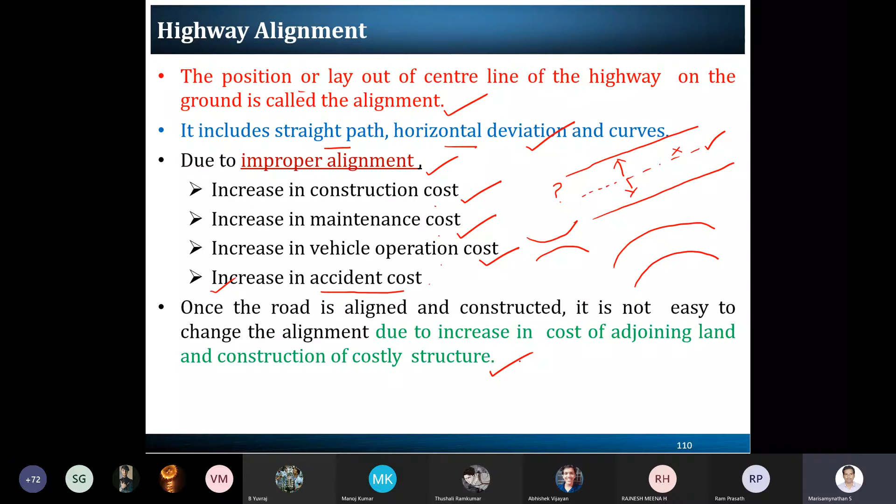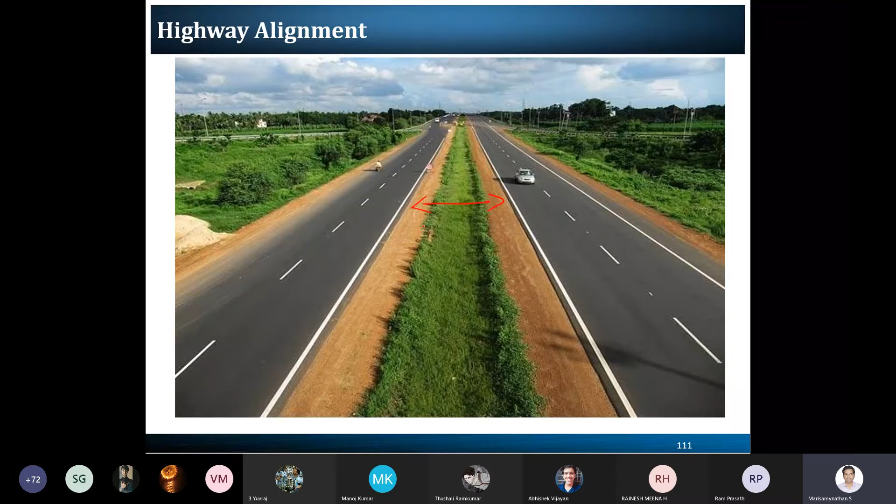This is one example of an Indian highway, with respect to the center line, how the straight road is perfectly or properly aligned with respect to the median. So this is an example of highway alignment for a straight stretch. In the horizontal curve, how it is there, the vertical curve - this is also one example of a vertical curve, and this is another example of a horizontal curve.

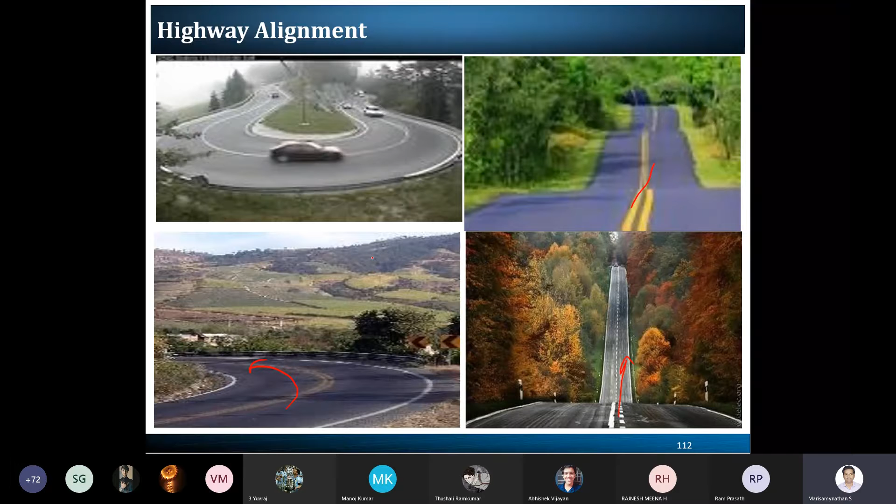So all this alignment we are going to study in the next unit with respect to a lot of equations and various problems we are going to solve in unit 2. So with that, these are some of the requirements we should consider.

First one is the shortest path. Yesterday itself I discussed A and B - maybe this might be Chennai and this might be Tiruchi. So when you are planning to propose a road between these two cities, the alignment has to be made with respect to the shortest path. That will be the first criteria to reach this particular destination. This road will be the shortest road with respect to the distance and the travel time.

It is easy to ride on that particular road with increasing vehicle speed, reducing the vehicle operating cost. Then it has to increase the safety for all the persons traveling on that particular road. Probably accidents should not happen.

According to that, the road width, median, signal, flyover, all these facilities we have to incorporate. Particularly when it comes to hilly stations, all these points need to be incorporated. Finally, economical - the government who is proposing at the end, and all those using it, whether drivers or passengers.

Both sides have to get the benefits with respect to the economical point. So these are the four major requirements when it comes to highway alignment. As transportation designers, we need to keep as mandatory points: it should be the shortest path, easy for everyone to travel in that particular corridor. Whoever is traveling should feel safe on that road stretch. Finally, both sides or both authorities have to get the economical benefit. So these are the four major requirements when it comes to highway alignment.

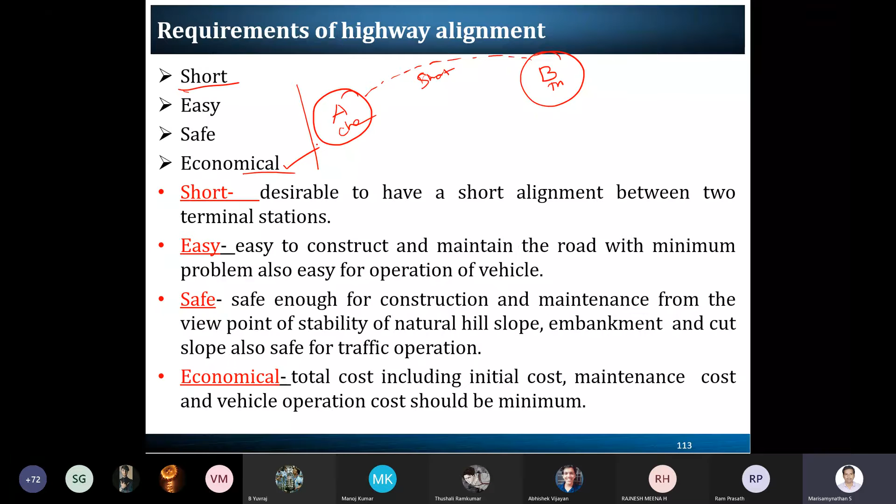Also, when it comes to alignment, some points we need to consider. One is the obligatory points. When you are trying to connect A and B, in case some intermediate town is there, or some mountain is there, how we are going to pass that mountain, how alternative routes are going to happen, or we are excavating and making a tunnel.

So all these points we need to consider when doing that alignment. Also, some points we should avoid passing through, like religious places, costly structures, or bridges, unsuitable land with respect to soil conditions, or agricultural land. So all these things we need to consider as obligatory points with respect to the requirement.

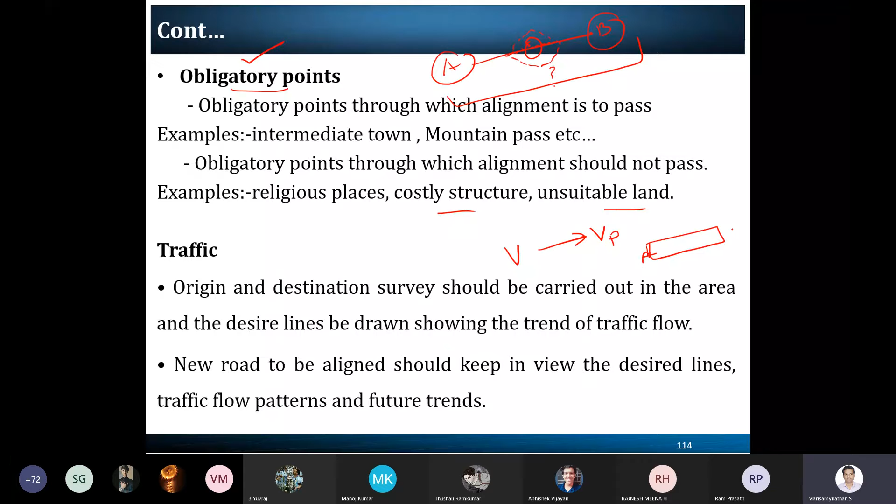Second, the traffic origin and destination, and other surveys we have to perform. Based on that, what will be the present traffic volume conditions, and what will be the future projected volume. According to that, how the road infrastructure we are going to provide between A and B needs to be considered. So traffic volume is considered the second most important parameter.

Then the geometric design - what kind of gradient, radius of curve, sight distance, ruling gradient. How we are avoiding sudden changes when it comes to sight distance, or when a pedestrian or vehicle is crossing, how we are going to incorporate those things. So all the geometric design elements need to be considered as another, third important parameter.

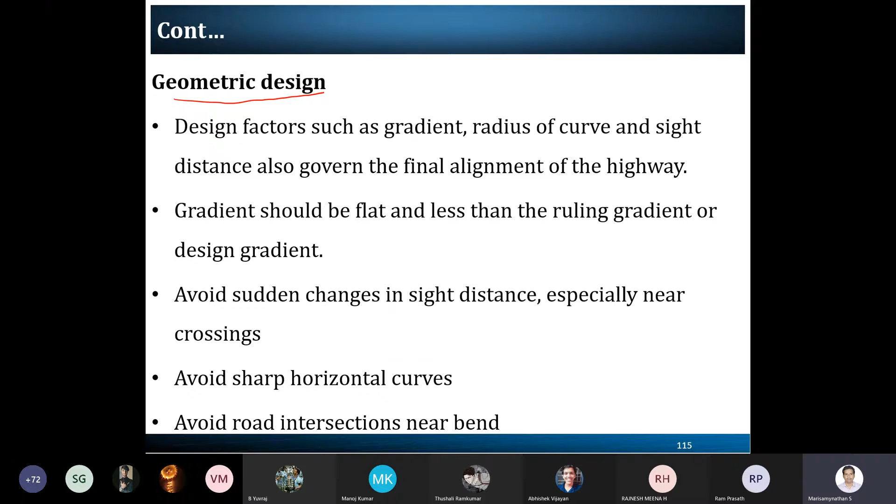Then the fourth important one will be economic - how the cost is allocated or distributed. The breakup is made between the initial cost, maintenance cost, and how we incorporate the vehicle operating cost with respect to the benefits or losses. So all these things we are considering.

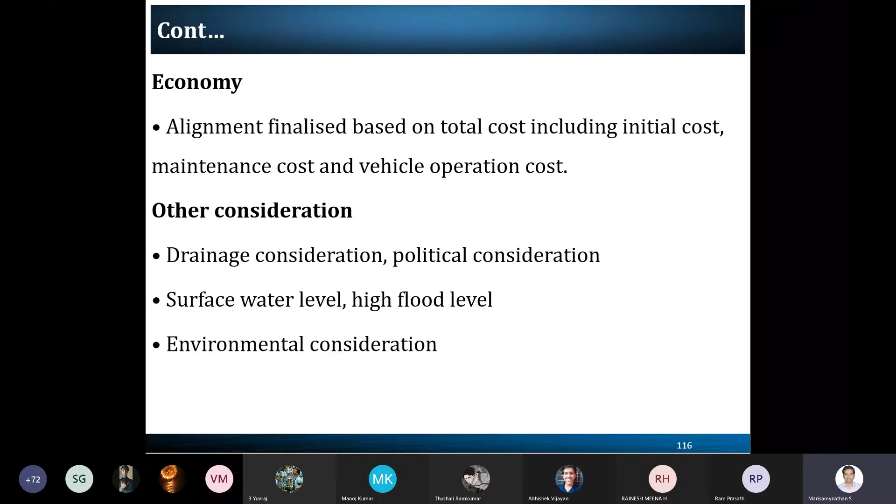Other than that, we consider drainage, some political considerations, water level, flood level, environmental considerations, and topographical points - poor drainage, flood prone areas, unstable hilly features might be there. So all the topographical control points also need to be considered. This is with respect to the factors we are considering on one side.

The second one will be with respect to materials and construction features - what kind of material we are using, how much depth we are going to excavate, how the alignment is going to happen with respect to different soil conditions. Based on the soil conditions, how we define the thickness of the pavement, and how near the sources of embankment and pavement materials are locally available. So all the materials and construction related features also give another requirement when it comes to the design aspect.

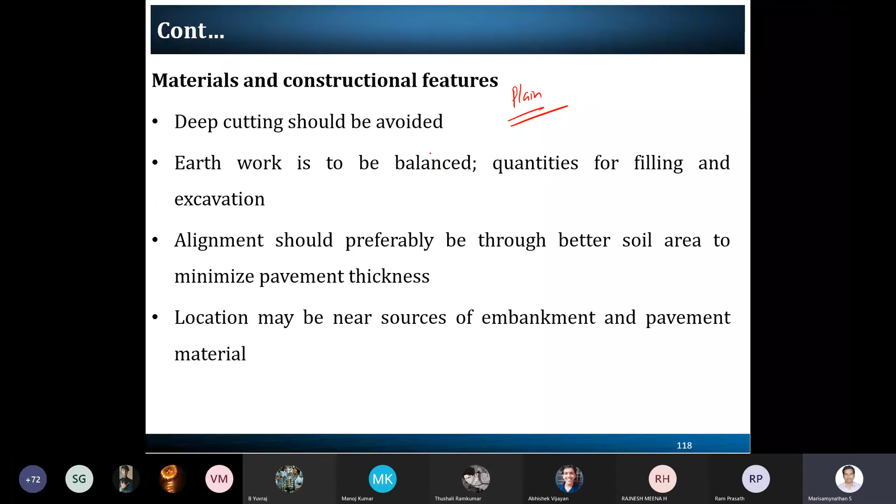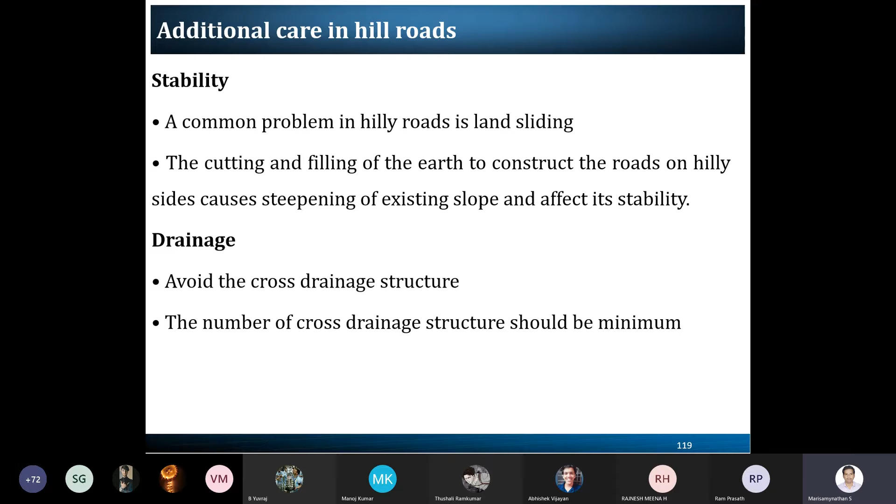So all the things we need to cover when it comes to hilly stations and hilly roads, additional care has to be taken.

These are the brief introductions about highway alignment. What are the alignments we are doing? What are the factors and requirements with respect to the four main factors? We have discussed this briefly and summarized it here.

For example, the place or town should be connected. Say, Tiruchi to Chennai, if you want to connect it, how Perambalur and other cities like Sriperumbudur and Tambaram are all connected, how all the stops are connected, and how we prepare the shortest route, considering slopes, gradients, and animal movements.

What kind of horizontal curve are we providing, 150 meters to 350 meters, how variations happen in case of sudden turnings, what will be the stopping sight distance at intersections, what is the subgrade soil, how we provide foundations, earthwork balancing, and adequate right of way in case rivers or railway tracks are crossing.

How we provide crossing facilities, what locally available materials can be used to construct the road, and in case material needs to be transported, how we get benefits and minimize construction and maintenance costs, and how the road sustains natural hazards.

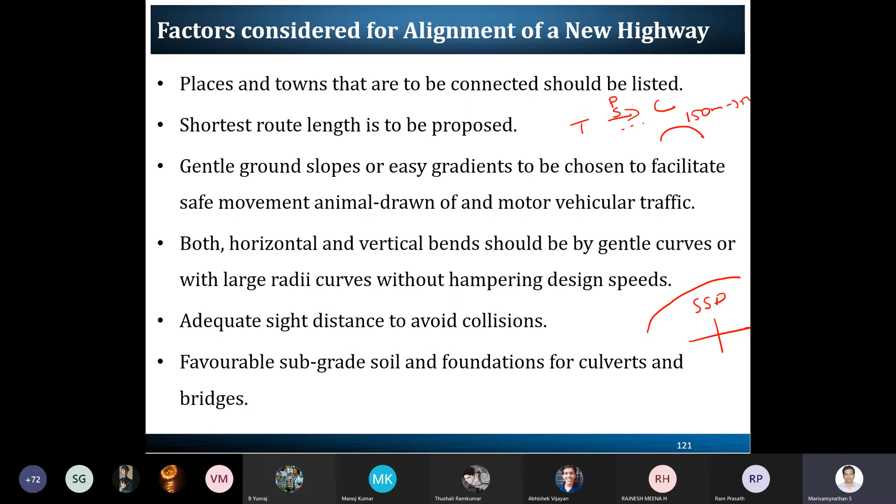Finally, drainage is a very important parameter, so we must provide proper drainage facilities along with the road structure. All these factors need to be considered when it comes to the alignment of a new highway. That is all the points I have summarized here.

So this covers the principles of highway alignment, requirements, and controlling factors. I have given it very briefly at the micro level. We will study it in the second unit. Still, if you have any doubts, please post your question in the chat box.

The next component of the first unit is engineering surveys for alignment. Mostly you have studied the surveying subject in your second year, third semester. We adopt the same survey concepts for constructing the road. Probably you have already studied all the surveying techniques and equipment used.

You may have studied these briefly and some equipment at the micro level too, with different applications in surveying. One of the main applications is in the transportation engineering field—not only roads but also railways, highways, waterways, and airways involve different kinds of surveying, to enable better transportation modes.

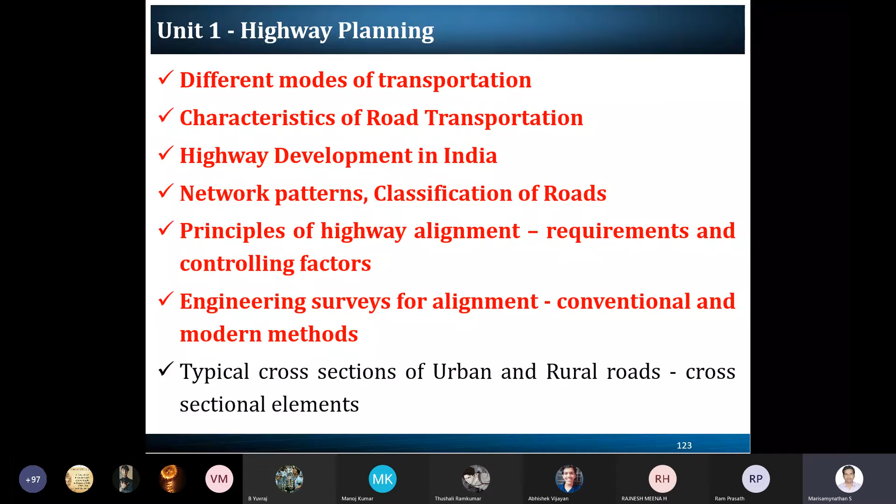Now let's narrow down our subject to roadways and see what surveys we are performing. Before finalizing any highway alignment in a highway project, various engineering surveys need to be conducted. Other than traffic volume surveys, origin-destination surveys, and other traffic related surveys, there are typical engineering surveying techniques—not transportation or traffic surveys, but engineering surveys.

So one will be the map survey. From the map itself, you might have the Tamil Nadu map or the India map showing the road network or existing patterns. From the map, we might identify some feasible solutions—A to B could be one solution, and there could be another alternative solution. From the map, we try to get clarity about the choices or feasibilities.

Second is the reconnaissance survey, where we go to the field and check, with respect to the map, the feasibility of constructing facilities on that particular stretch. From there, we get ground clarity on how it actually is.

Then the preliminary survey, using different kinds of equipment like tacheometers and theodolites, performing different kinds of surveys, we come to know the actual difficulties and the actual feasible conditions for constructing the road.

Finally, we are summarizing the detailed report. Probably we might be choosing the best route for the construction's purpose.

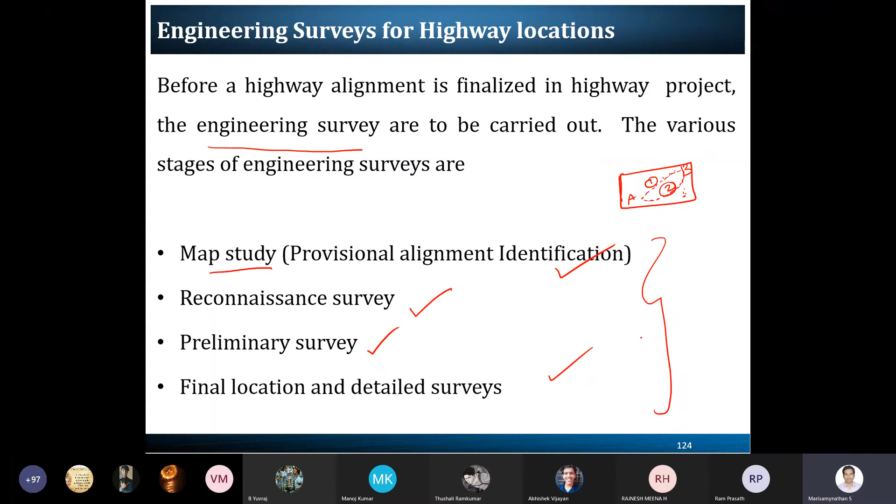So this is one of four major engineering surveys which we follow when it comes to the highway project. So map study, as I told, from the map different kinds of alternative routes are suggested, sitting in the office itself by seeing the topographic map.

But nowadays it is not done in the paper manner. So we have plenty of advanced software like QGIS, ArcGIS, and different kinds of software. In that software itself, the different layers are there about that particular city, state, or town.

From that we can understand. It's like a Google map - how we are seeing and getting knowledge about the route path. So that's how the survey is done using the map.

So from the map, we try to avoid valleys, ponds or lakes, rivers, some naturally existing facilities we can see. For example, in the Google map, if you go to satellite view, you can see where the hills are existing.

Even in normal typical mode, if you look, the rivers we can see, right? So in case hills are there, how we are passing that mountain, that can also be studied from the map study.

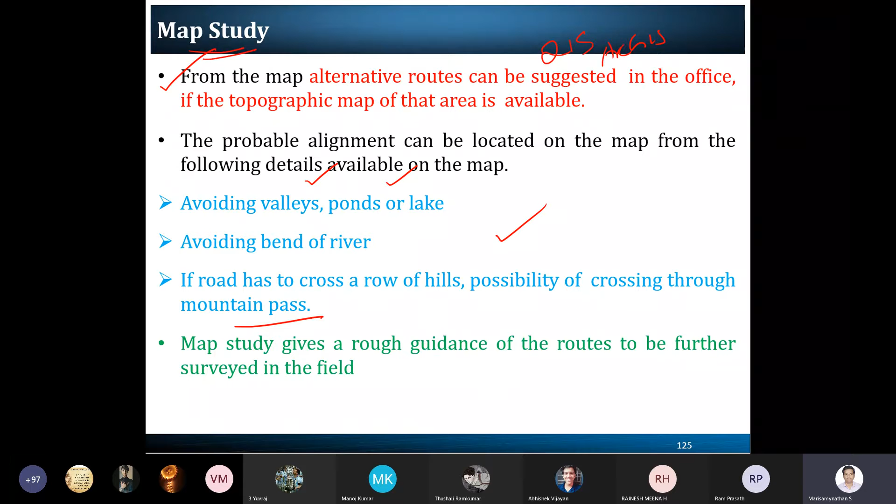So these are the major benefits or points we can incorporate from the map study, which is the initial stage of your highway project.

The second will be the reconnaissance survey. So whatever we have seen on the map, we are confirming with respect to the field - yes, it is really existing on the field.

Yes, the hill is already existing, the rivers are existing - those kinds of confirmations we are doing. From that, we are checking which one will be the most feasible route for the detailed studies.

So all the things - gradient, how it is there, length of the gradient, and some other permanent structures existing. So all the things which might not be available on the map.

So on the map, the turning might be there - whether it will be the horizontal curve or the vertical curve, that is the question in that particular map, am I right? So those kinds of micro-level information we were getting from the reconnaissance survey.

So once we get that detail, we are preparing the merits and demerits of the different alternative routes. Two routes we have finalized, route 1, route 2, to reach from origin A to B.

So this might be R1, R2. So merit and demerit for both methods we are identifying, we are comparing, and which one will be giving the best option - that we choose for further analysis.

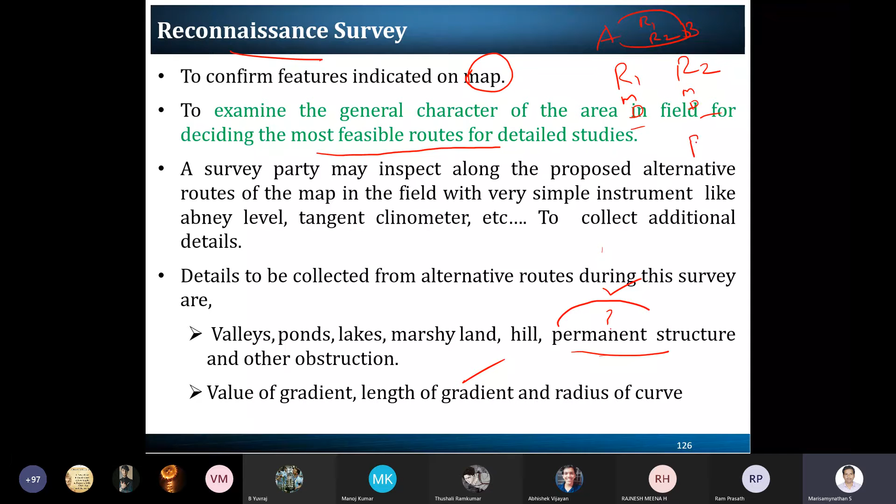So out of these two, we are identifying that R2 will be the best solution. For example, if you are going to R1, rivers are there, some hilly stations are there, so different kinds of obstacles are there.

So that's what we are avoiding, because the construction cost is more, maintenance costs are high - that is the reason we are choosing R2. So as an example, this kind of conclusion we might be able to arrive at.

So when we are comparing the things which we observe from the map and how the physical checkup is going on the field, and the simple surveys we are doing, comparing with respect to different properties.

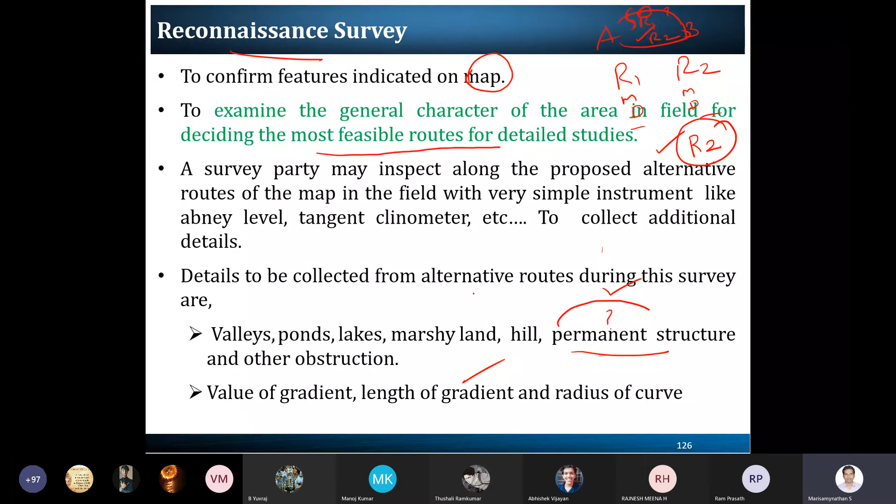So based on that merit and demerit, we are trying to identify the suitable solution for the construction's purpose. So this is the main motivation of the reconnaissance survey.

Then the next one will be the preliminary survey. So this is an important survey - one alternative you are choosing from the reconnaissance survey, and all the physical information.

And detail of the topography, drainage, and soil conditions, everything we were collecting from the preliminary survey to make the proper alignment.

Also, it is giving how much quantities are required when it comes to earth filling and other construction aspects. So what is the requirement of the aggregates and other materials?

So the quantity as well as the cost estimations can be done based on that preliminary survey. Here you already studied two types of surveys: the conventional approach and the modern approach. The conventional surveys typically involve chain surveying, tacheometric surveying, and trigonometric leveling. So when you use this kind of conventional equipment to cover and record data, that approach leads to the conventional approach.

At the same time, you might have studied modern surveys, like the inbuilt theodolite, aerial photographic and remote sensing techniques. These advanced surveying techniques, I think probably you opted for that elective this semester. So when you perform modern equipment-based surveys using GPS to collect the preliminary data, that approach is considered a modern approach.

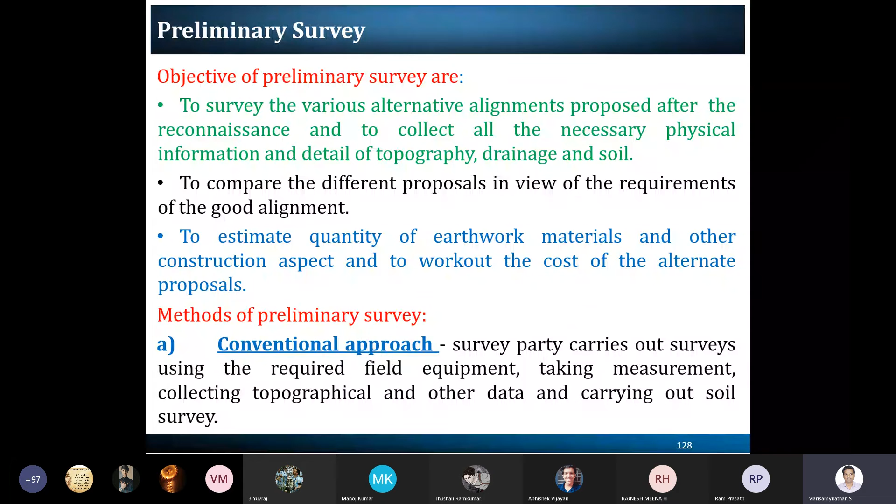Finally, when performing the conventional and modern rapid approaches in the field of preliminary survey, we are able to bring the best alignment by considering all the factors in the construction, particularly when trying to reach A to B using R2. R2 is our finalized route from the reconnaissance survey. So these are the things we confirm from the preliminary survey.

Finally, you come back to the office. So all the surveys whatever we have done, everything is transferred to computerized and properly documented form, and the constructions are going to happen on the field.

So different kinds of concepts you might have studied. The center line we try to finalize, different kinds of intervals we follow for plain, rolling and hilly terrain. The drainage we are calculating, the earthwork we are calculating, the drainage details we are working out, soil tests are done, soil samples are taken, and the tested CBR value is found out.

So all the detailed information about that particular location is collected, then we elaborate and prepare the detailed plan, design and cost estimate of that particular project under the final location and detailed survey column. So these are the four surveys: map study, reconnaissance, preliminary, final location and detailed survey reports. These are the four major engineering surveys in the field of any new highway project. It is very simple to understand.

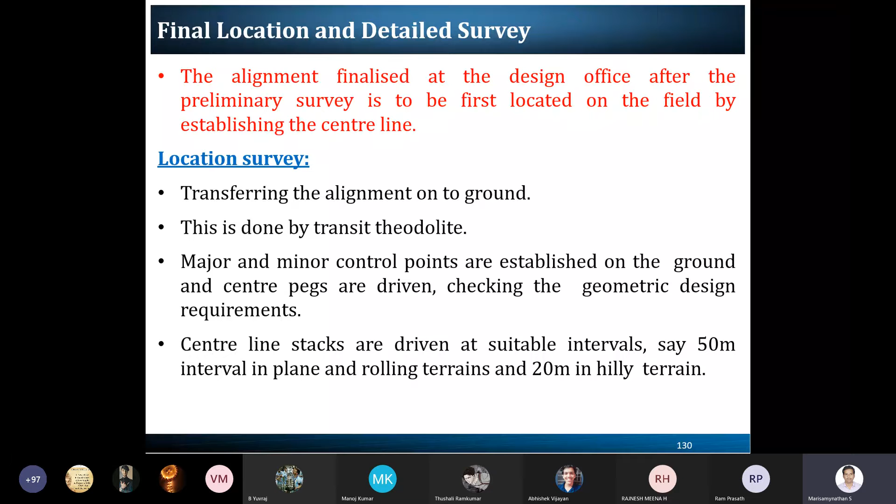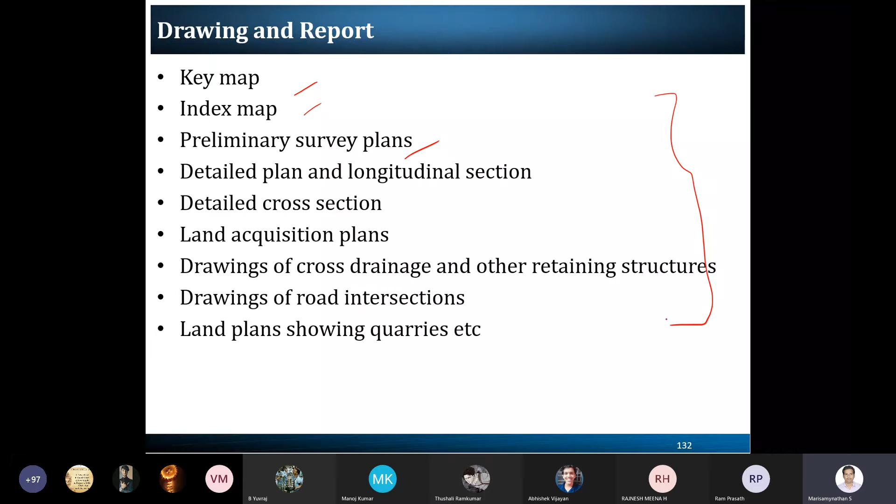So I have summarized all the points. This is also a report which we have to produce: the key map, index map, and preliminary survey plan. So all the things we have discussed, the different parameters, soils and other things, according to that the report can be presented in terms of a map or a report.

So these are the things we follow when it comes to a new highway project. All these things we have to consider: first the map study, reconnaissance survey, preliminary survey, the locations, the final alignment, then the detailed survey and report preparation, and the material survey. Irrespective of pavement, aggregate or soil, all the material survey has to be prepared.

Then the geometric and structural design. In case a bridge or heavy structure is proposed, what will be the geometric and structural design has to be done. Then the earthwork, then the pavement construction, then the construction controls, how it is happening. So all these 10 points we have to keep as a report when proposing a new highway project.

So this is the detailed information about the engineering survey, and here we conclude today's session. The four major concepts we have covered are the principles of highway alignment: what is highway alignment and what are its requirements. Four major requirements with respect to different controlling factors that we have seen at the macro level and the micro level, with respect to design problems and derivations, all of which we will study in a detailed manner in unit 2.

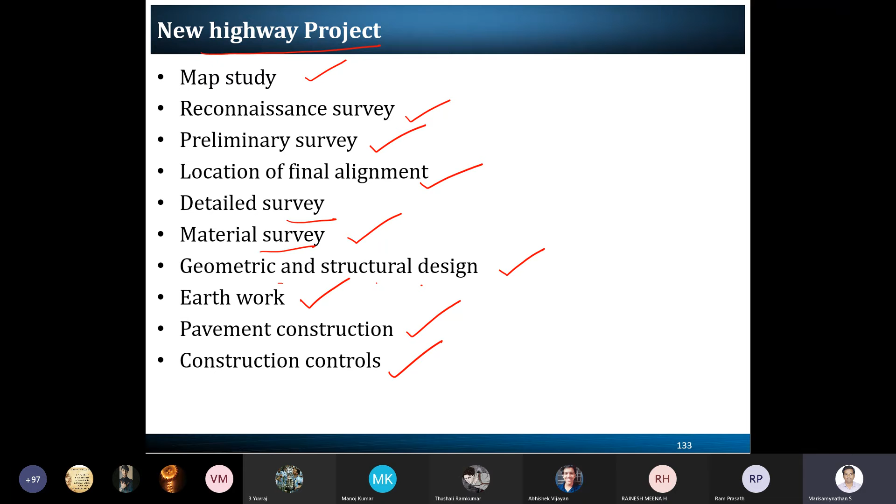Okay, so here I'm concluding. Any doubts from today's session?

Next Monday we will see the typical cross section elements, which we already studied during our introduction to civil engineering, but I will still recall all the cross section elements with respect to typical road cross sections. Once that's over, we will start our second unit.

The second unit mostly involves problematics, so you just be ready with your calculator, pen and paper when we start our second unit. So this is in brief.

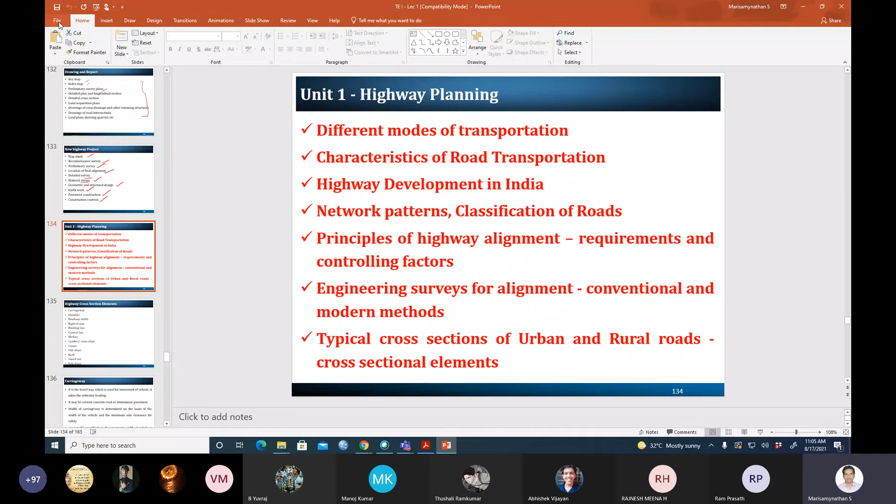Hello, sir. Hello, sir. Yes.

Sir, you said that we can make a road wider, but we cannot construct the road again. Sir, why is it so? I have seen in many situations that when the pavement is not in good condition, or it was constructed in the past but the present condition is not that good, even then the pavement is constructed again. So sir, why did you say that we cannot construct the road again once it has been constructed?

See, once the construction is over, we may go for patching, or you might be saying the pavement overlay they have done - removing the existing pavement and then overlaying it. So patching might be done and widening might be done. But instead of that, we cannot go for new construction; we can maybe go for alternative roads. But between point A and B, if you want to make small changes, it is highly difficult.

The main issue is land acquisition. When it comes to city corridors, it is already saturated with different facilities. With respect to urban areas or places where development has already happened, getting proper land is not at all possible. So that's what I mentioned - constructing a new road is difficult.